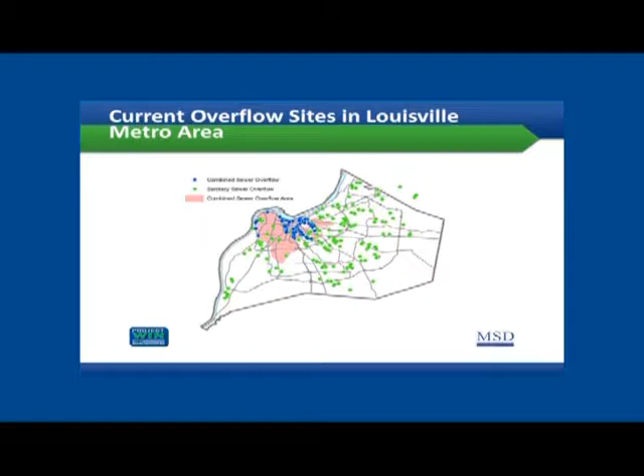In MSD, what we call the sewer belt is the Watterson Expressway. Anything inside the Watterson Expressway, and that includes Louisville and the downtown area, is on a combined sewer system. Anything outside of that expressway, the green dots, is a separate sewer system. So since we are in the city, we are in the combined sewer area, just a little information on what is a combined sewer.

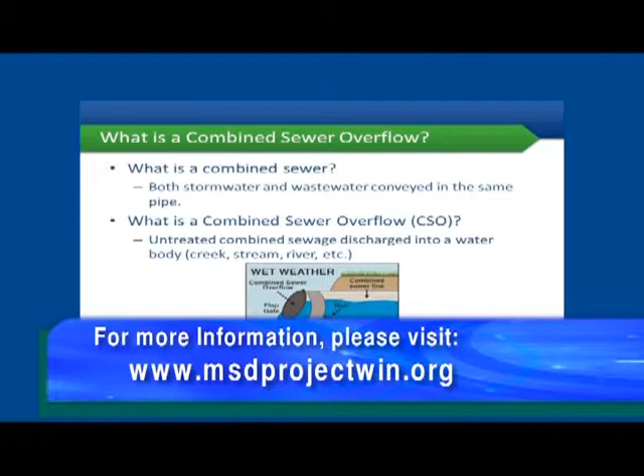Many years ago, when there were streams in this area, as we wanted to develop, we took those streams, we turned them into a pipe system, we contained them so that we could develop, and then as we grew and developed, the best way to send all that drainage flow out the pipes to the river, we also tied in our sewers. So in the combined system, the downtown area, CSOs are permitted only during rain events when you have overflows. And these overflows go into our creeks and streams and waters, and in our area it's Beargrass Creek and the Ohio River. This is a permitted event when it rains.

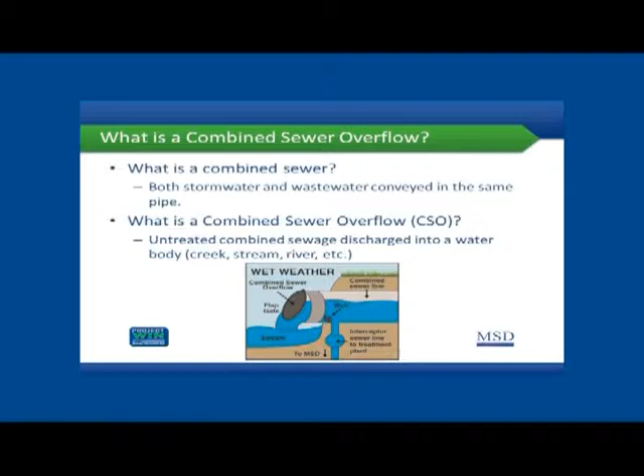So, you say it's a permitted event, why are we here? It is a permitted event, but also there's violations of the Clean Water Act, and starting in about 2003, the EPA came to Louisville, and we're not the only one. Actually every city that's on a river is under some form of consent decree or about ready to go into consent decree, because the EPA and the federal government finally came in and said, we need to reduce that overflow.

We need to eliminate as much as possible that overflow in the raw sewage, diluted or not, that gets into our system. So in 2008, we agreed and submitted a mandate to help correct this, both combined and separate. It's about $850 million, approximately 320 of it in the combined system. In 2009, it was approved, and we're moving forward.

The two key notes on this to date are that the combined sewer program, which is where we are today, all of our projects are mandated and had to be completed by 2020. The separate sewer program has to be completed by 2024.

So what can we do to control overflows, CSOs, or combined sewer overflows? There's source control projects. In the combined system, since drainage is getting into the sewers, impervious surfaces such as asphalt and concrete add to the system. There's a lot of point source and green infrastructure to help with that. We'll talk about it a little more. There's also a lot of source control projects, downspouts.

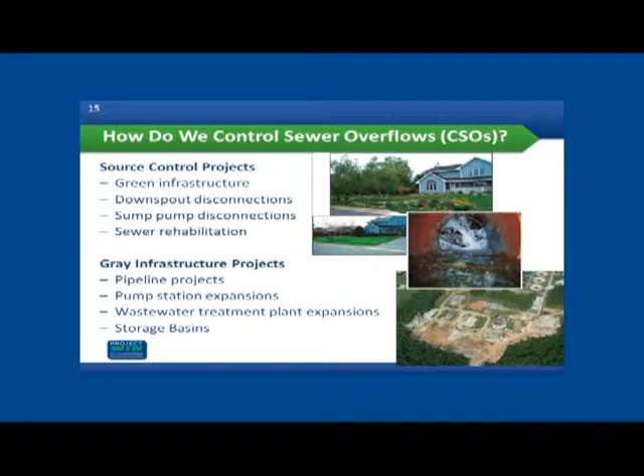And then the other side of it is the gray infrastructure projects. These are large pipeline projects. So it's the gray pipes, the gray pump stations, the concrete structures that we put in place, the treatment plant expansions, the storage basins to handle that overflow.

Now, I need to note that there isn't a storm we can design for to eliminate all overflows that may happen. For example, I'm assuming a lot of people were around a couple weeks ago on the Thursday and Friday when a lot of the county averaged 6 inches of rain. That's a design storm that you cannot handle. So we have picked a typical year design storm, an average event.

So MSD projects across Louisville. I mentioned several times, we're downtown. The green area represents the combined sewer system. You have Beargrass Creek and then the Ohio River. And these blue dots represent the sewer overflows, the permitted locations.

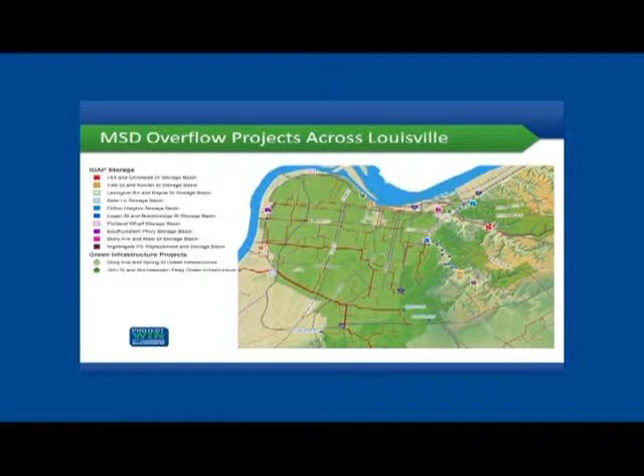So, if everybody would get their clickers, we're going to now have a little fun and get our thumbs warmed up on the use of the clickers. These are simple to use. You will see numbers relating to questions on how you can respond. These are really great to get a large group of input because it's anonymous. It's simultaneous. We all see the results, and it's an equal voice for all. Those that are a little more reserved or quiet have a chance of a voice. So it's an equal voice for everybody in the audience, and we can see as a group live responses.

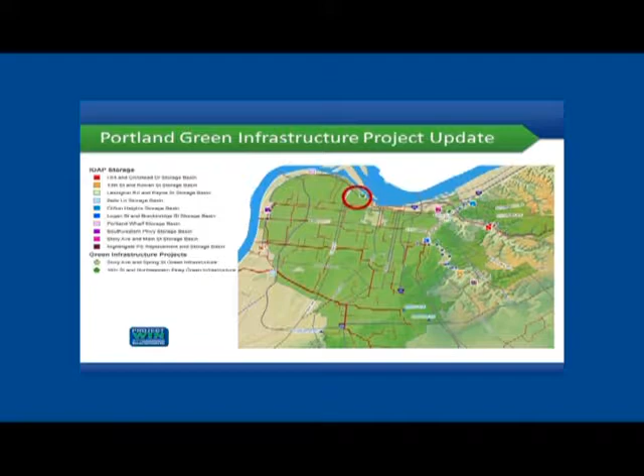We're going to talk a little bit about the project and go into a little detail. There are two projects in the Portland area. There is the CSO 190 Green Infrastructure Project, and then there's also the Portland Wharf Basin Project. The Basin Project will be discussed at an upcoming separate meeting. Today we are talking just about the project area for the CSO 190 and the Green Infrastructure Project.

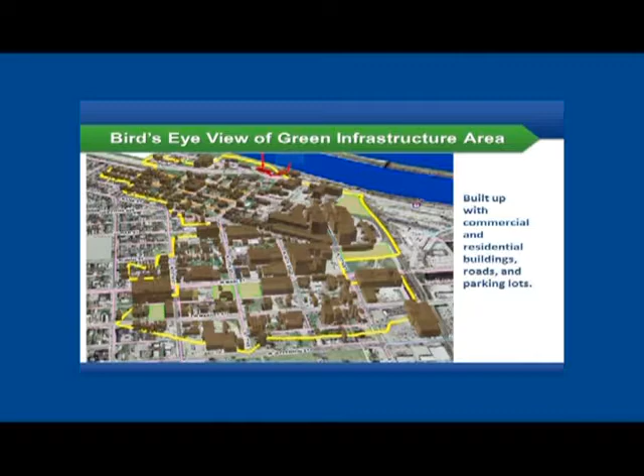And this is just an overview of the area, showing that it is a pretty good mix of businesses, commercial, residents, and a lot of parking lots, a lot of impervious areas that we can come in and address. So the goal, I mentioned, this is the area. What is in the orange or the yellow bold line, that is the project area. And basically, a drop of rain lands within that area, it drains, stays within that area.

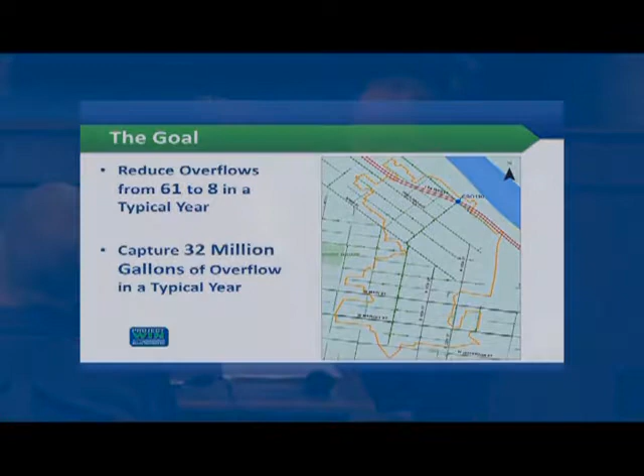The main sewer, and this is a note, is on 17th Street. The main drainage sewer is on 17th Street, and it goes to the CSO 190, which is, if you're familiar, at the end of 17th Street, there is an MSD flood pump station. And a lot of our flood pump stations are near or associated with CSOs because that is where the drainage goes, and they can pump it out or not have the sewer or the river come back up.

So this overflow per typical year, I mentioned before that we have to design for what is a typical year the majority of the time. That overflow activates 61 times. We are mandated under EPA to reduce that to only 8 times in a typical year. And what that results in is that we have to capture 32 million gallons of overflow in a typical year. So we have to come up with a project that will prevent 32 million gallons of diluted sewage from discharging into the river.

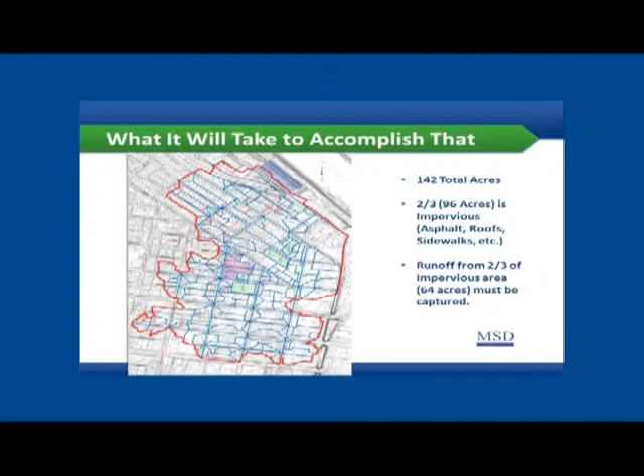So what will it take to accomplish that? The area that we're talking about, now it's in red, this is the same area, is approximately 142 total acres. 96 acres is impervious. So that's asphalt driveways, roofs, sidewalks, etc. To reduce that 32 million gallons, we have to go in and find 64 acres, or approximately the runoff from 2/3 of that impervious acreage. We must somehow find a way to contain it and get it out of the combined sewer, so it won't overflow, and into either a storage basin or a green project.

And this, just real quick, is to show that we're already looking at some of the areas and how we would phase some of these projects. We have to have this project complete by December 2017. To do that, we're going to do it in phases. Phase 1, we plan to advertise for construction and start construction late this summer. And I mentioned the main sewer is along 17th Street. Well, that's where we need to go first. So that's why we picked that area. And then phases 2 and 3 will follow approximately 4 to 6 months apart.

How do we do it? So there are some things that we have to stick with, we have to work with. A lot of times you've heard the example about the river. We couldn't have put the bridge in Bullitt County. There's nothing there. The river is here, that's where the bridge needed to go, and you had 71, 65, and 64, main traffic arteries that connected in that area. So that's where the bridge needed to go.

In our area, if you're familiar with catch basins or storm drains, storm inlets, the storm drains and storm inlets, the infrastructure that collects the storm runoff, are at the intersection. If you look at the intersection, at each corner is the storm inlets. So that's where we need to concentrate. It wouldn't make any sense for us to do something on some of these areas to capture storm runoff and drainage when it is being captured by the existing infrastructure at the intersections. So that's why we're focusing on capturing the water at the intersections.

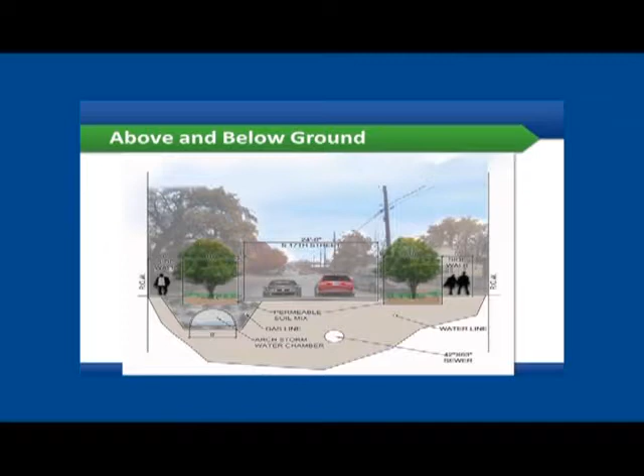And our proposal is that there will be underground arch storm water chambers. This example shows it's about 8 foot in diameter. This is a half circle. Water, just like we showed previously, would go into a catch basin. Instead of going into the storm sewer, it would go into these arches. It would be stored there. It's a little volume if we get a large event, so we can handle it, but then it would percolate down into the ground.

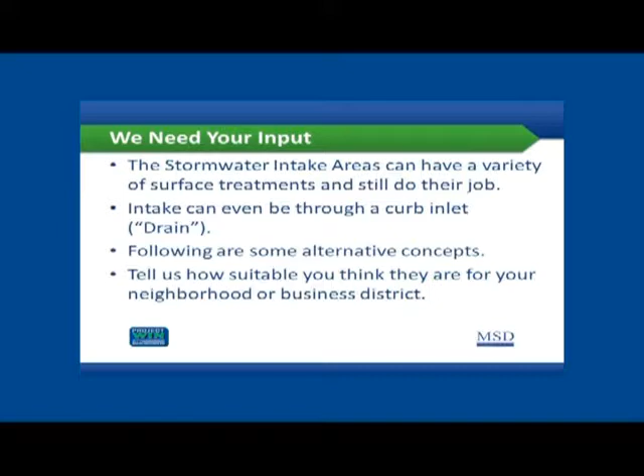What we can do and we can talk about, and where we do have several different concepts that we can discuss, is above the ground, and that's what we're going to talk about today. So we need your input. We would like to talk about the variety of treatments and the different types of green infrastructure practices that could do their jobs. Take the existing intake or the curb inlet drain system, use it. Instead of redoing existing infrastructure that's there, we can more cost-effectively put our money into a more beneficial green solution. And we'd like to show you some concepts that we came up with today.

And what we would really like to do is, some of the demographics questions we asked before were to get you thinking about where you live, where you interact. We're going to ask you that. We're going to show you some concepts. And what we would like to do is to see how these concepts might interact with what you do daily, where you live, or how you function within this area.

And I do like to note that what we are proposing is all in the right-of-way, so that we can work with the existing right-of-way, and we'll go in a little bit more detail. We've already had a few stakeholder meetings with some private property owners and some businesses in the areas, and if you have an interest, you can get with us after that to maybe do something on your property. But we control the right-of-way. We have the ability to get into the right-of-way. So what we're proposing today would be in the right-of-way.

As we go through the options, there will still be some general maintenance that needs to be done by the property owner or by the neighborhood. But in general, any bigger or long-term maintenance will be by MSD, and I'll go in detail. But this is just an example of Crop Street. This is a plan view. This is what us engineers love. We like our plans and our details and stuff.

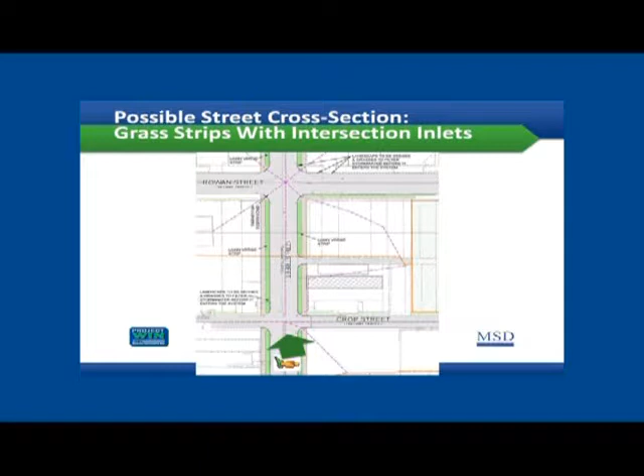But this shows, you're standing here looking up 17th or at Crop, and this is just an example of us coming in and putting in a lawn strip of grass, adding it back to the area to where you get rid of that impervious concrete sidewalk, and a strip of grass can allow a lot of percolation.

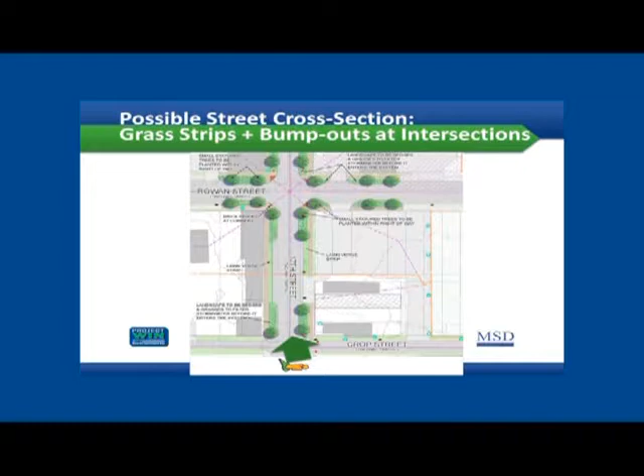Another example is bump outs, grass strips at the intersections. So what we would be talking about here is at the intersections where you have the existing curb and gutter, we have these bump outs, this is what they're called. And then we just threw some concepts of some trees. So in this area we would also add some trees. And this is just a representation of the bump outs at the intersection, so we can have apples to apples, a little bit of what it would look like with just the grass. And this is only at the intersection. Here's the curb inlet, the gutter, how the stormwater would get into the system.

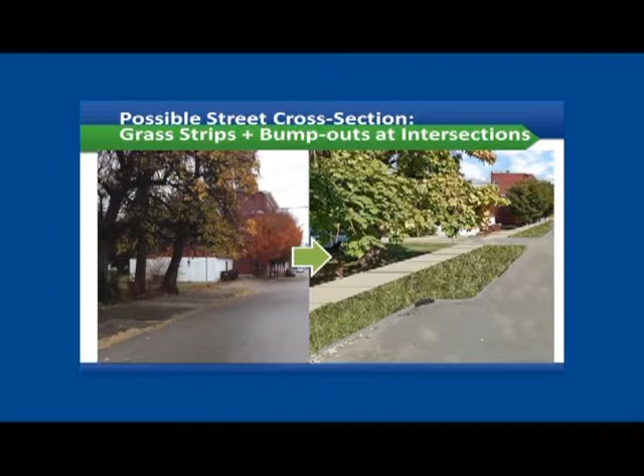So, we've come up with 6 possible solutions. We're going to go over each one of these in a little bit more detail and allow you to use the same type of votes. But just basic in a nutshell, it's as simple as the grass strips in the sidewalk, and then there becomes a combination of the grass with trees. You have the intersection bump outs with trees, bump outs with plantings. It could be the trees and ornamental grasses, shrubs. It could be a lot of things as we discuss. And then basically option 6 is including everything. So you have the grass, trees, bump outs, and plantings.

And part of why we're getting with you guys is to get this information, get some feedback from the neighborhood, and then we can come back at the advanced design concept and show some of the things we put in.

So concept number 1, grass strip. A little bit more detail. This is the 6-foot wide sidewalk, grass next to the road. This is the lowest cost concept to construct, and it serves the purpose of the project and will meet our goal for our consent decree. I mentioned there'll be a little bit of maintenance. Obviously on that one side where it's sidewalk, those property owners will now have the general maintenance you would normally have to do for your yard, mowing the grass. Now you'll have an area in front of your house that you'll have to mow.

The next is grass strip bump outs with trees. Same concept, same information. The added benefit of helping with the heat island effect, cooler shade of the trees, a little bit higher maintenance because now you have the addition of leaves that will have to be taken care of in addition to the grass.

Another concept is there might be some areas where the trees, for various reasons, line of sight, businesses, aren't suitable. We could put in plantings. This could be ornamental grasses, this could be shrubs. The grass is still probably a weekly, or the way it's been raining these last couple of weeks, two times a week mow, but these would be areas with less maintenance because you would have the existing plantings, and there could be some general maintenance as a property owner or a person that works in the area. As I mentioned, MSD would have contracts where we would quarterly go out and look at these and make sure everything is living and working. So this would be the bump outs, and instead of grass all the way, you would have some sort of plantings.

And then I'm going to call this everything. This is taking 1 through 5 and combining it. So you have the grass, you have the bump outs, you have plantings, you have trees, the benefits of the shorter pedestrian crossing distance at intersections, the trees, shade, the sidewalks and stuff. This would be the ultimate as far as the long-term MSD maintenance and also the long-term neighborhood maintenance. This does have a higher maintenance impact.

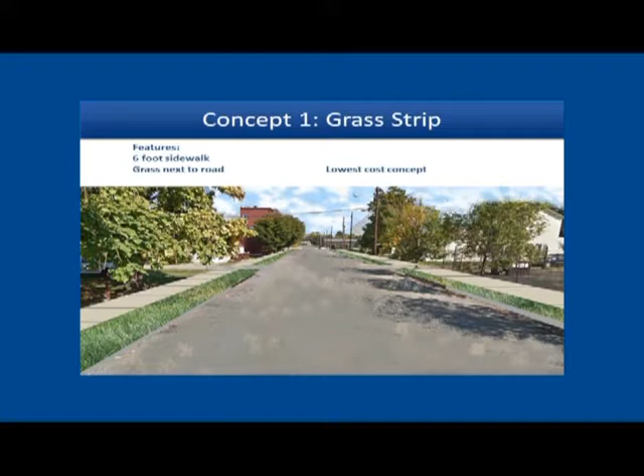So, grass strips. This is where we're going to talk about each of the 6 concepts. Low maintenance costs, pretty typical. There's some maintenance as far as mowing. What we would like everybody to vote, 1 through 7, 1 being very unsuitable, so not a good idea, to very suitable, and neutral in between. As a community, we all work together. This is an opinion, whether you're in the area or not, so everybody can vote. What is the suitability of the concept for residential areas? So just voting on just a grass strip and sidewalk.

So we're neutral pretty much is the vote here. We have a very suitable, which is good, and we're a little above the mean between 4 and 5, so we're sort of between neutral and somewhat suitable. So this concept for a business area. Same. Consistency. That's always good when you're an engineer.

So, concept 2, we're going to talk about the grass strips with trees. A quick review. The only difference is the potential additional maintenance of the leaves in the fall, and then the general maintenance of mowing the grass. So we're going to ask the same questions. The suitability of this concept for a residential area. If everybody could vote.

Very good. So everybody in the room thinks this is a very good concept and very suitable, majority. And even the somewhat suitable was on the positive side of the neutral. And then this concept for a business area. Very good. It's split 50-50, but still it's on the positive side and a strong mean. So the mean is suitable.

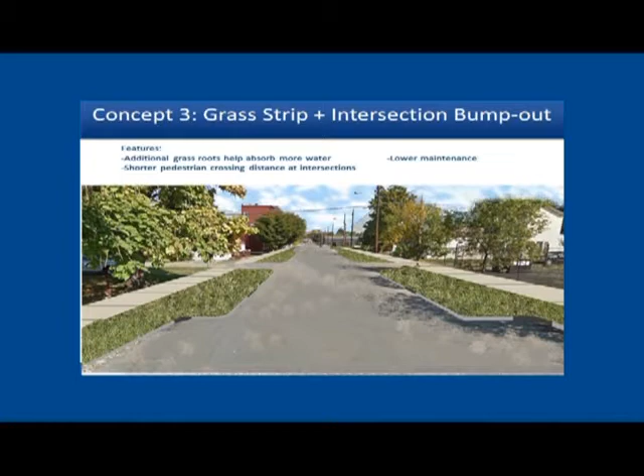So going a little further, this is the bump outs. Same maintenance as a grass strip, the added benefit of some traffic control with the bump outs and the shorter pedestrian crossing distance at the intersections, and a little bit better line of sight as far as turning radiuses and traffic coming in and out of the intersections. So if you would please vote on this concept for residential areas 1 through 7. Neutral and somewhat unsuitable.

And then the same concept 3 for business areas. We're right in the mean and right in the neutral, but we have a strong vote unsuitable and then a strong vote suitable. So, and then this is concept 4, grass strip, bump outs with the trees. So, residential area.

The mean is 5, so we're a little bit above somewhat suitable. More votes for that one. And then the suitability of concept 4 for the business area. So the grass, the bump outs, the trees. Same, 5.25. So somewhat suitable, more on the positive side of neutral.

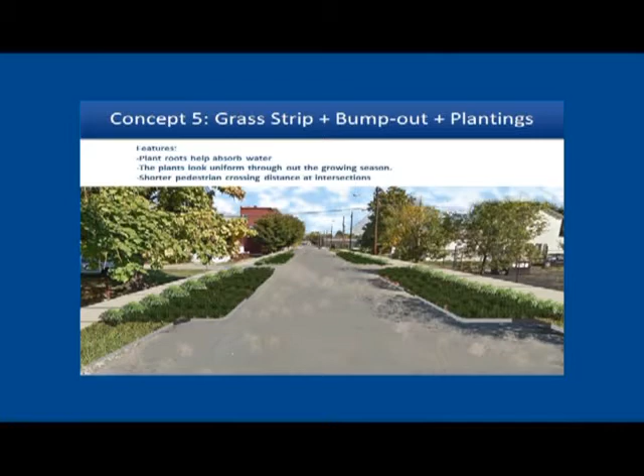So, 2 more. We have the grass strip, bump outs, and plantings. So this is using those bump out areas and planting them with ornamental grasses, some sort of plants that are low maintenance, maybe some type of ground cover. You don't have the trees that may have some high maintenance aspects. Who would be in charge of the maintenance of the grasses, the plants? MSD will contract with a landscape firm to do minimal quarterly.

Yeah. So the question was who would be responsible for the maintenance of, say, the ornamental grasses or plantings in this area. And what we found in the past is there's a fall. You get everything ready for the fall, you cut things back, and then you get everything ready in the spring. But then we'll also have a guy that'll go out quarterly, look at things, and if plants have died, replace them and stuff like that.

The general maintenance, it'll be difficult for MSD to go out there and pick up every piece of litter or every little weed that may pop up here or there. So there still would be some general maintenance out there, but the bigger maintenance of the plantings, the grass will still have to be mowed, but of the plantings, MSD will help.

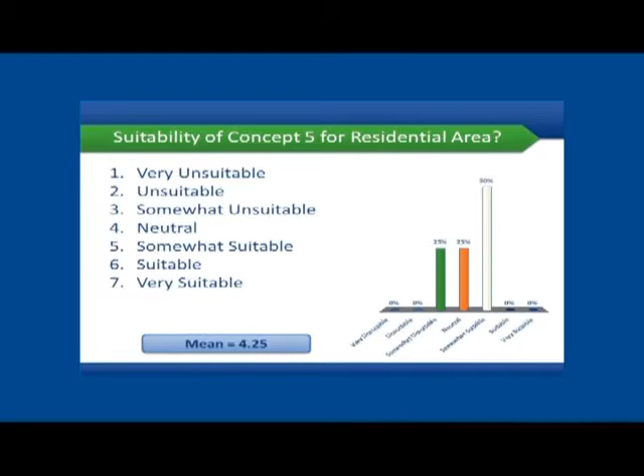So for a residential area, we're right around neutral. And then for a business area, somewhat unsuitable. The mean is right at neutral, but we do have 2 of the 4 is somewhat unsuitable.

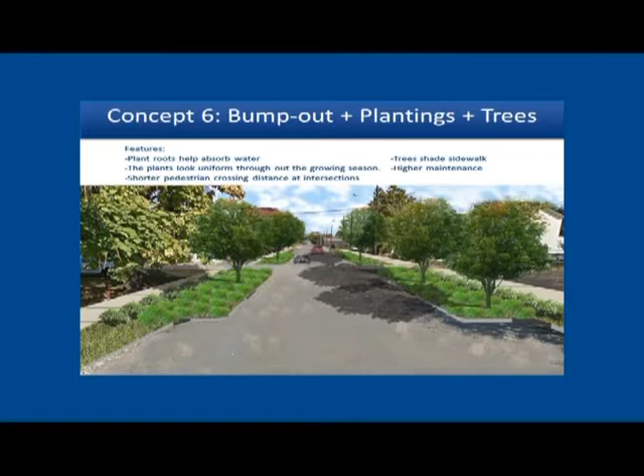And last is the concept where you combine all the first 5 concepts into one. So you have the grassy areas, the bump outs or trees, natives, plantings, landscape. This is the greater landscape planting plan. So please vote on the residential area. Again, we seem to be pretty steady around neutral. And then for the business area, we are somewhat unsuitable.

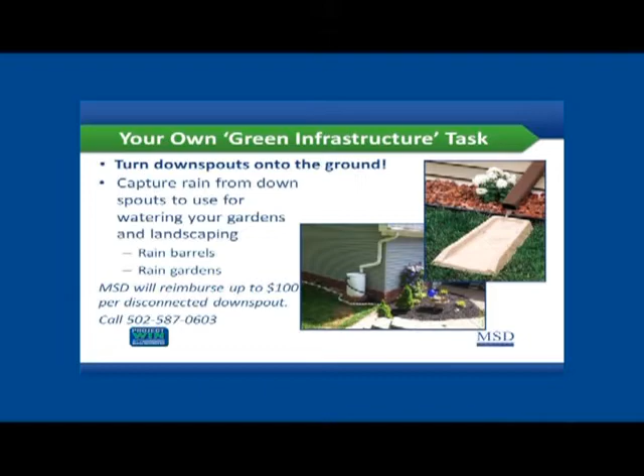You can get with Steve in the back at the end of this meeting. You can also call the number, write it down, 587-0603.

We are working together. We're a community as far as public health and safety. So hopefully we've given you a little more information and you understand what's going on in your community, especially when it rains. And we really would appreciate your help and assistance that if you are out and you see an overflow, if you see something like this happening anywhere in the system, please call MSD immediately. And it's the same number, 587-0603.

You can also, we're repeating, but go back to our webpage, and public input will give you some more information on our project website. So, as I stated at the very beginning of this meeting, we are trying a new process where we have the 4 informational meetings. We get with the community at the very beginning of the project before pen and ink and designs on paper, get some thought processes. So we would like some input. We're only going to get better if you guys are honest with us. So please, with your clicker, let us know, at least of your experience to date, how satisfied are you with this process we're going through. Somewhat satisfied.